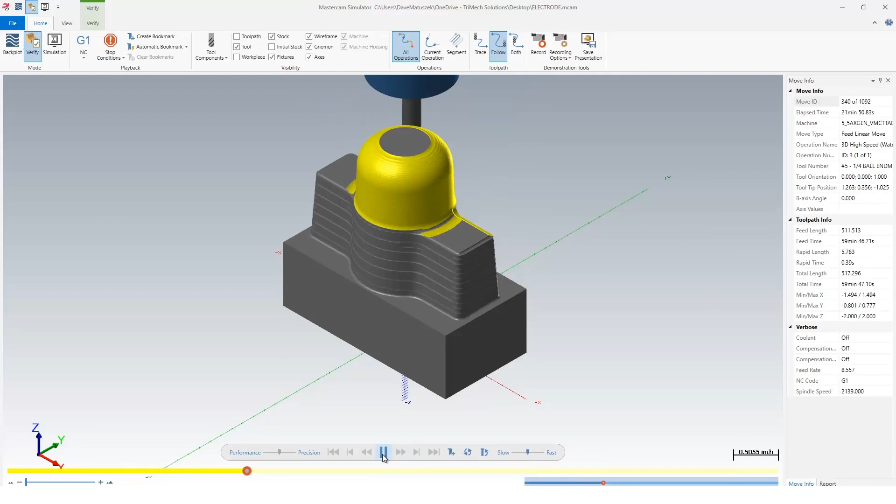And there is my holder hitting. And that's usually a bad thing. So I'm going to show you some things we can do to deal with that without having to go find a longer tool. First thing I'm going to do is I'm going to come into my options, and a lot of people don't know about this collision checking feature.

I'm going to turn it on, and by default everyone has the value here, trim to avoid gouge. And we have a holder clearance so that I have 50 thou clearance around my holder. Let's run this toolpath and see what we get for a result. You're going to get a warning. The warning is just telling me to make sure that I verify and that I'm understanding what material is being machined and what's not. So we're okay with that warning there.

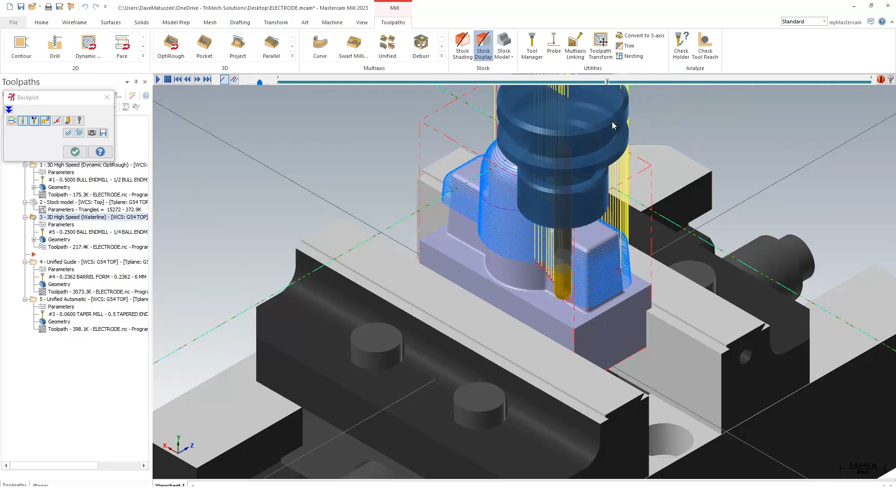Let's look at our cut. So you can see it trimmed out these areas of the cut down here where the holder would have hit. And I do have some options to relink how this toolpath behaves when it's going across the top, but at least we're not hitting our model anymore.

Now another option I have that a lot of people don't know about again is this one. Tilt to avoid gouge. Now in order to do this I actually need a multi-axis license, so you do need that. And I'm just going to actually set my max tilt here to be the maximum the machine can do. We'll say 30 degrees.

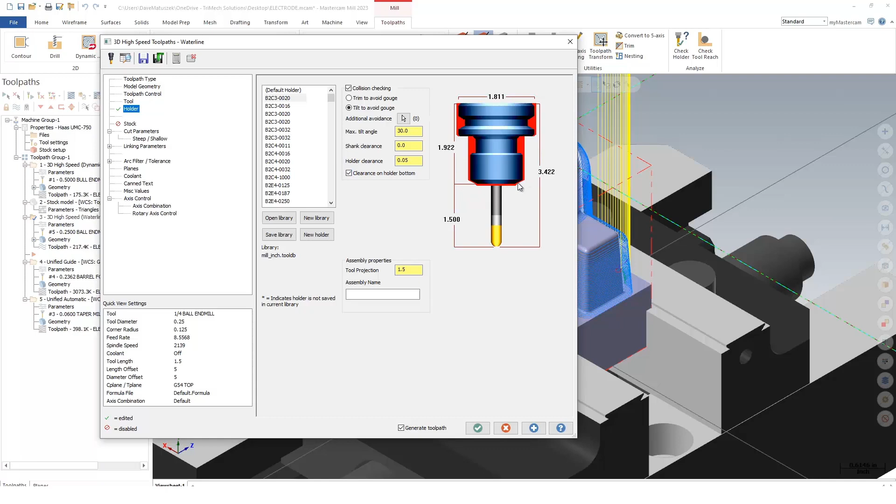And I'll actually put some holder clearance on the bottom so that I make sure that the bottom doesn't hit. So I have the entire holder as a collision zone now. And I'm going to hit OK. I do get another warning that because this is a multi-axis operation, I can no longer do arc filter tolerances on this. It has to just be straight output. So it's just telling me that it's not going to work anymore.

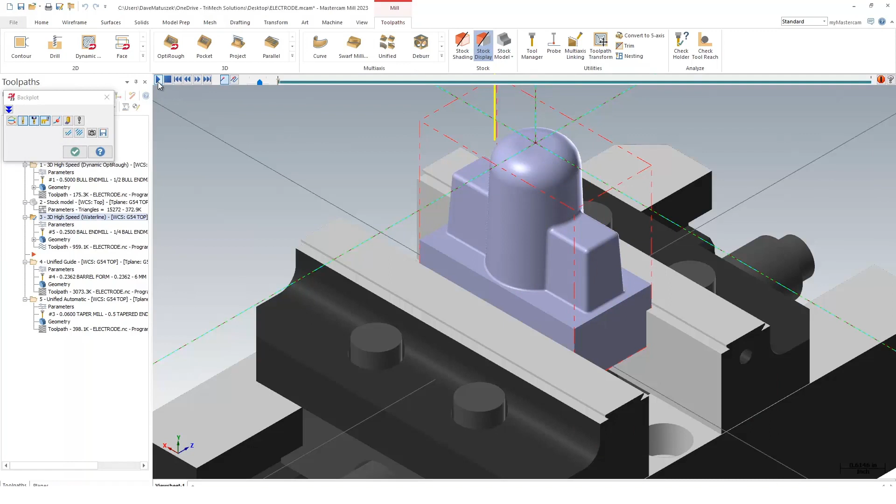I get the same warning to make sure I backplot or verify this. And let's see what happens when we tilt to avoid our gouge. All right, let's backplot this and take a look. The tool is vertical wherever it can be. And then we'll see the tool tilt out. It gets to some of these bottom areas here where it would hit. So this tool is tilting to avoid that gouge.